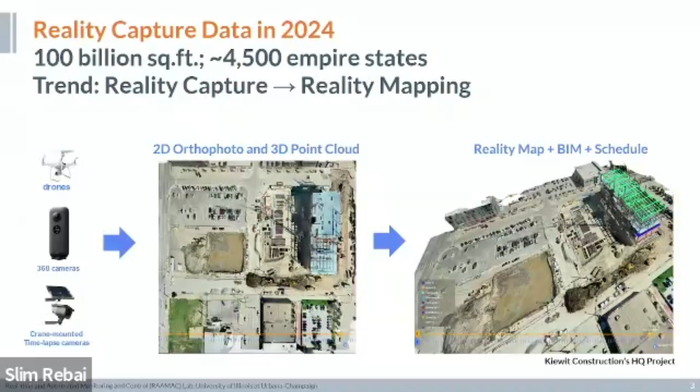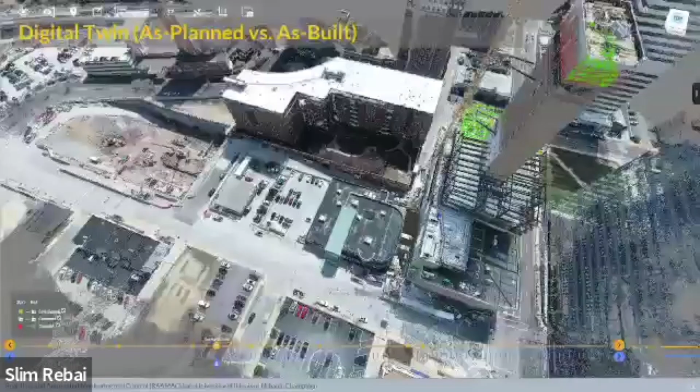As photos and videos are captured, models of reality are generated. Then you upload your design and your schedule, and you can integrate the two. So at any moment in time, you have a snapshot of what is expected to be built on the job site and the reality, and the two can be twinned together in the same coordinate system. Once the twin is achieved through a number of interactive and semi-automated techniques, you usually end up getting your work packages, locations, or areas color-coded.

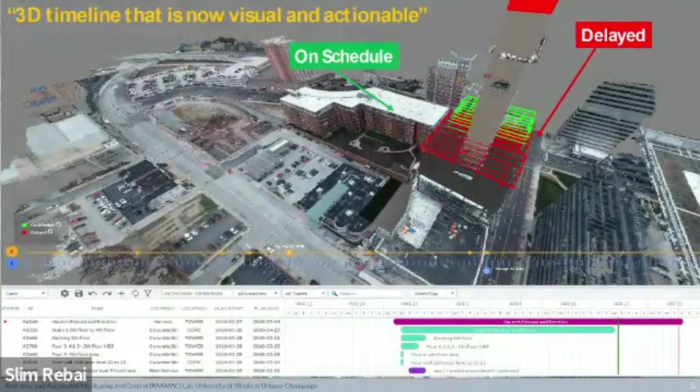You see the schedule at the bottom of the screen. There's an orange timeline, a slider that shows you what snapshot in time of the site you're looking at. You see what the design and schedule are dictating to you, and the reality shows you how much work has been done. This capability has been extended to indoors. If you have not seen these experiences before, this is what it looks like.

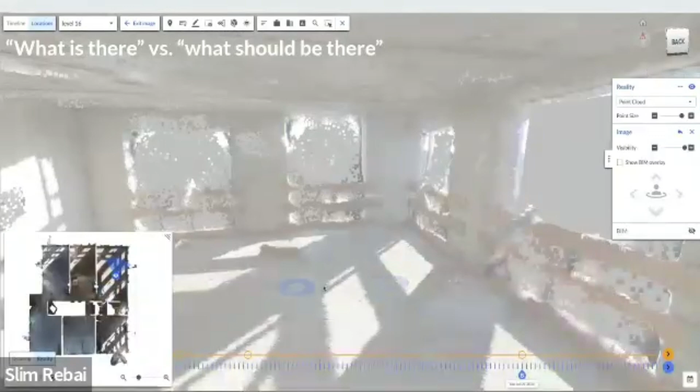You basically walk around with the 360 camera. It's a structure from motion-based algorithm used with an architecture efficient enough to run on the cloud. Video is uploaded automatically, and it generates these two types of deliverables. You get a floor plan automatically generated from the point cloud, and the donuts you see on the screen are frames extracted from the video. When you generate a reality model like this one, the scene is entirely measurable because there's a point cloud behind the scene supporting that capability.

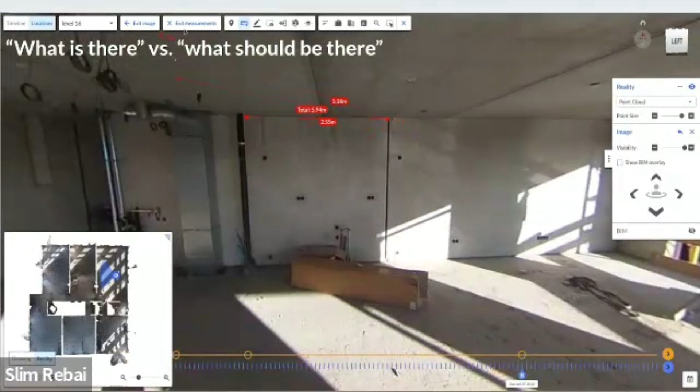So these capabilities have already made it to the market. Like I said, thousands of job sites have already been exposed to it. And owners and clients that we work with, they're asking for more. The demand for automation has increased over the past few years.

Now, in the old days, we used to see this in the oil and gas community where people used to ask for earned value analysis. But now, interestingly enough, in the United States, we see that with the healthcare community, Pfizer, Kaiser Permanente, for example, data centers. We've had the opportunity of working with Meta, the company that owns Facebook, Microsoft, Apple. They've all mandated generating earned value reports, and also electric vehicle and chip manufacturing plants.

The main drivers for automation are two things: payment application. On average, every contractor in the United States is behind their payment by 2 months. So the ability of being able to verify the work complete and issuing that payment is one of the drivers for these types of reports. At the same time, for many of these projects that we engaged, the nature of the contract is requiring the owner to make sure the project ends up on schedule. So risk mitigation for any T&M job, which is time and material, or GMP, guaranteed maximum price, are driving these reports.

But the nature of the request for reports has transformed over the past few years. One, broadly speaking, owners are interested in comparing design against the reality of the work without a schedule as one deliverable by itself. Two, the ability of updating the schedule without 4D BIM. So there's no 4D BIM, complete separation of a schedule model. And lastly, when it comes to punch lists, the idea of being able to count how many elements we have and where these elements are located.

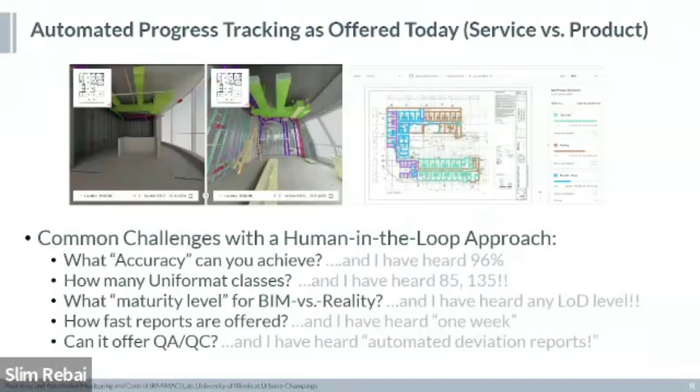We've been in this space for quite some time, and many of you have been exposed to this problem. Actually, at this conference, there are 15 papers on the same topic of computer vision. So I thought instead of getting to the technical detail, maybe I'll touch on problems. 3 problems. Detecting and characterizing progress from pictures is still a scientific problem. And I'm going to speak to why this problem has not been solved at scale. The second big problem for us is how do you create a reliable baseline that you can compare against? When you don't have the right maturity in the BIM model, what are the techniques that we can use for that? And lastly, how do you guarantee you have accurate and complete capture in the first place that you can use to compare against the design?

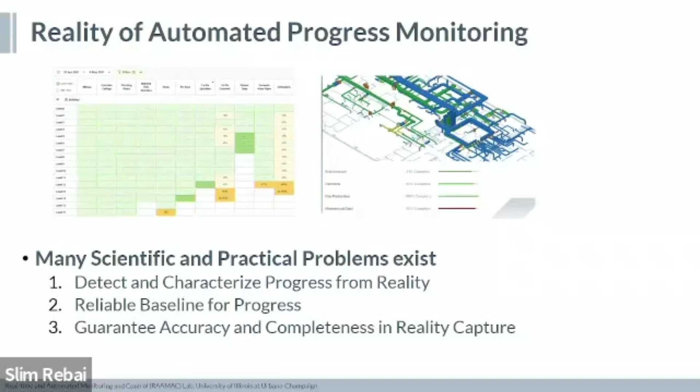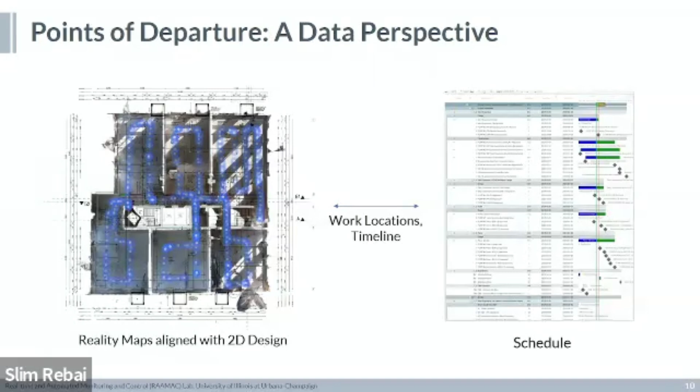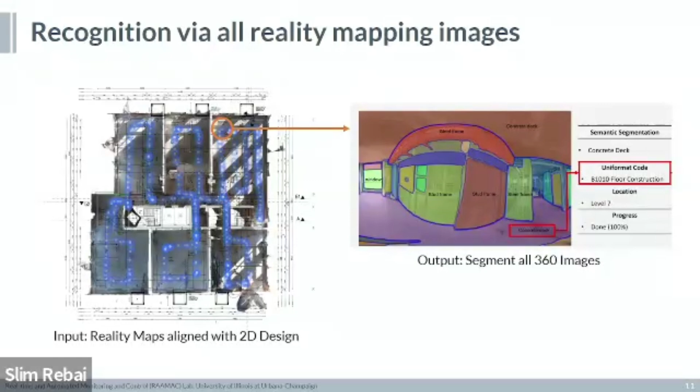And what we want to do is we want to see if we can use this basis to track progress, perhaps automatically, and eventually update both, meaning be able to reflect on the progress as documented and also the schedule. The way we want to be looking at this, in this specific paper that we have for this event, is by mapping to Uniformat. We are only looking at commercial buildings where ASTM Uniformat applies, and want to see how we can push the idea of image segmentation and automatically label different elements based on Uniformat.

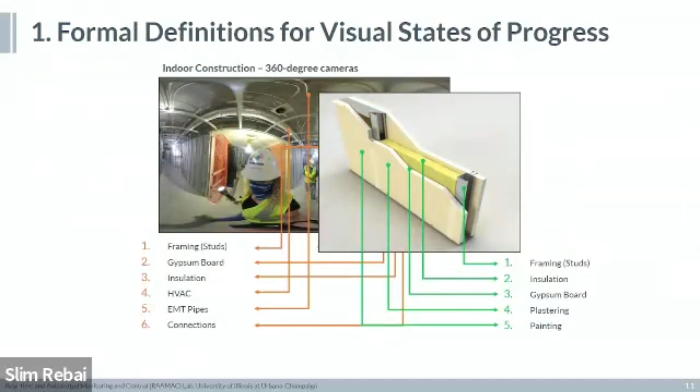Now, this becomes an interesting problem. If you look into our designs and look into what we detect from reality, these are two completely separate issues. Uniformat classes, if you look into a BIM model, you may simply model a drywall and non-visual information would be enough for you to declare it as LOD 400. But if you want to do visual progress monitoring, you need to know framing, insulation, gypsum board, plastering, painting, and whatnot. So in this work, there are a few elements that you can tap into.

One, we've actually formalized mapping between what we call visual states of progress against 650 Uniformat class of objects. This has been validated. So you have these states. What that does is that when it comes to image segmentation, you actually don't have to worry about Uniformat. All you need to do is to make sure you look into these states of work in progress.

Once that detection is done, we use the Uniformat as a guide to map what we detect from images, use Uniformat as a mapping against the schedule activities. That's a natural language processing technique that we've done there that brings the Uniformat into a common language. And for now, just imagine that quantity takeoff has been done, whether that's manual or automatic. So we use Uniformat as a common language.

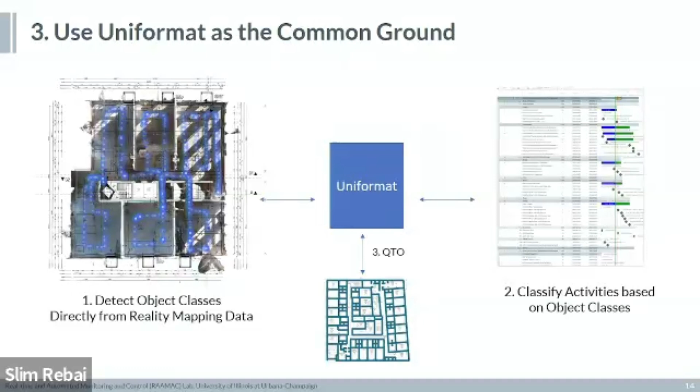So the result of that process, if you can automate it, you would get color-coded 2D designs that are reflective of the progress. And on the right side, you see the progress schedule. I'm not going to get into the details. Like I said, in the paper, you can study them.

We've used a Swin transformer model, which is a form of deep learning. Swin is a shifted window strategy for partitioning that actually improves the basis of self-attention for those of you who work on deep learning. It has proven to outperform ViT models. At this event, many computer vision papers are using ViT models. The novelty here is that apart from that state-of-the-art technique that uses appearance, we're tapping into geometry because it's a point cloud, and we're improving the basis of that.

The second contribution of this paper has to do with synthetic data. Now, I'd like to leave you with one thought-provoking idea. Deep learning algorithms, at best, learn abstraction of the reality. There's nothing more that they can learn. So the idea that we are pushing here is to see if we can learn abstraction of the reality through design. That's what we do in our design.

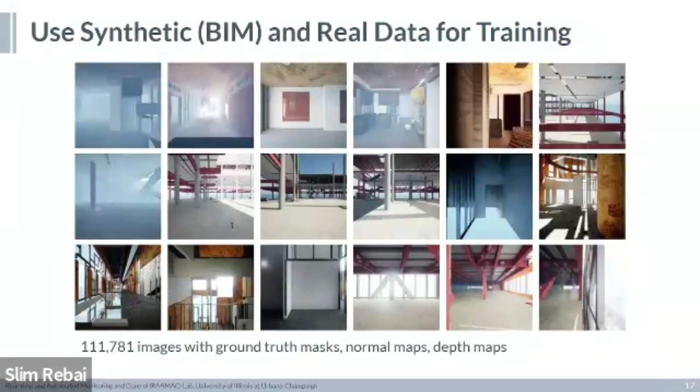So if we can use BIM and create a walkthrough path within the BIM, we can artificially create images that are associated with normal maps, depth maps, and ground truths, and you can use them as a base of the work. Again, I don't intend to get into the details. In the paper, you can actually see the efforts that we've done.

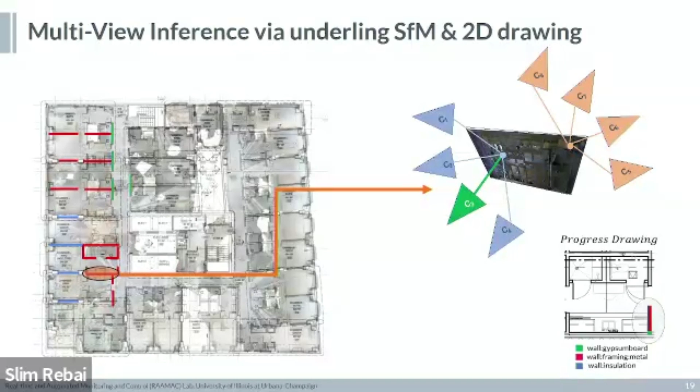There are a number of new techniques that tap into multi-view inference that relate what we can detect from pictures against areas that are manually color-coded in drawings from a quantity takeoff perspective. We have a new paper that was just published in Automation in Construction. It touches on using natural language processing, a totally different transformer model in this case, and it automatically maps the schedule activities against Uniformat.

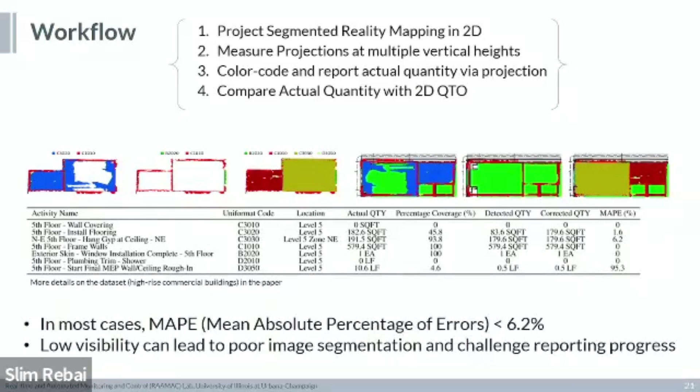And ultimately, in the paper, you can actually look into a simple workflow that we've offered that is validated, that projects reality mapping in 2D at multiple elevations, color-coded, and then we compare that against a quantity. The mean absolute percentage error that we've observed so far is actually less than 6%, which for the first few studies that we're performing is actually pretty remarkable in terms of what it can achieve.

Again, I don't intend to get into the details. There are a lot of details offered in the paper, but the key idea is the following. Use Uniformat to map computer vision image segmentation to schedule activities that are processed through NLP. And the data requirement for this will be making sure you have reality mapping projected in 2D.

What we need to do is to validate this at scale. So as I said, there are almost 650 Uniformat classes. We haven't validated all of them. Our synthetic data set is almost 112,000 images that, at the CVPR conference, will be released to the public so anyone can use it. And we want to scale that up. And of course, the last problem is the automated quantity takeoff.